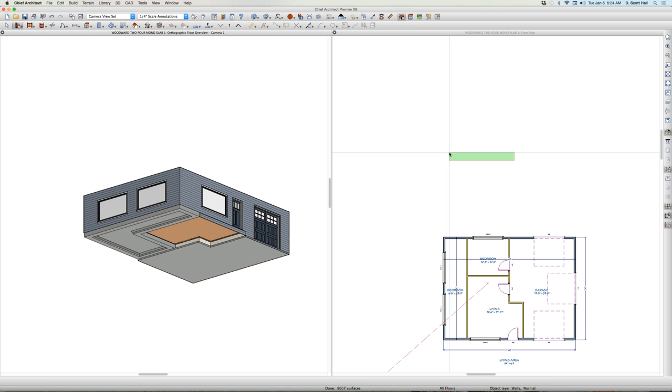This all started with a guy named Alan, ACAD user Alan. I'm going to try to cut to the chase as quick as possible. Here's the deal. Suppose I want to build a two-room structure. I'll make it real quick. I'm going to get to the whole purpose of it. I'm going to try to explain what I'm doing here.

This is what Alan, the ACAD user, had. He had a room here and he had a room here. He wanted to build with these exterior walls out of concrete block. I think they were concrete block. And he wanted to pour footing. He wanted to build this concrete block wall up to 10 foot high. And then in the center, he wanted to come back and pour monoslab here and here.

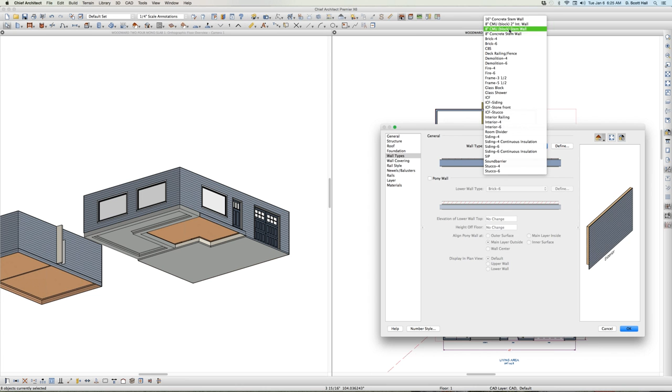And these walls right here are going to be concrete block walls. I think that's sort of what he was thinking, and I'll do it that way, just to make things consistent. These walls, he wants to change the wall type to 8-inch CMU block stem wall. So he wanted to build this structure with 4 walls of concrete block, then come back later and pour these 2 concrete slabs held in place, I think, by these concrete block walls.

But here's a key. He wanted to have a footing underneath this wall here. This is the garage, and this is a bedroom. So he wanted the garage lower than the bedroom. So he wanted a footing underneath this wall, and he wanted it to be monoslab that connected the two. Let me just see if I even have it. I don't even know if I have it. Screw it.

This is the purpose. I'm building 4 exterior walls, sitting on a footing going up, and inside I'm going to pour concrete slab. And I might just have a dividing wall right there. It might dictate that this floor is 6 inches lower than this floor. So I built a structure over here. I just got a little bit carried away and made it a little more complicated.

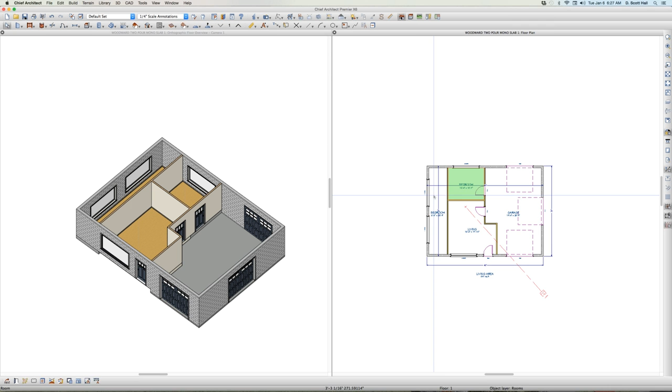Here it is. Here's his garage, and he's got a bedroom and a living room and these other rooms. Notice this garage is dropped 12 inches down, which is what a garage is, right? And if I looked underneath, the garage is a slab, that's a slab, and that's a slab. I've defined those as slabs. Monolithic slab foundation. I'm testing Chief. Here, a raised floor foundation.

Let's look at it underneath. What do you got there? Ain't this interesting? I call this a virtual slab. Have I built a foundation yet? No. I got level 1, period. By the way, I did a Skype with Glenn Woodward last night on this, and he helped me out a lot. So I'm just trying to take it a step further.

But the bottom line is, why do I have a slab with footings underneath this portion, which are the 2 bedrooms and the living room? The living room has a raised floor foundation. I get that. I haven't built the framing yet. This is out of the box, nothing special. But why don't I have footings for the garage?

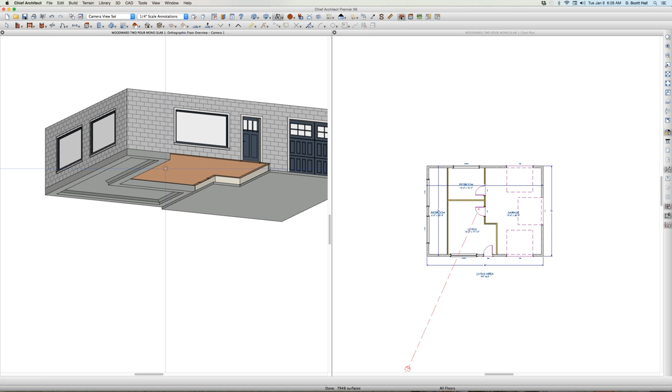I don't know. I call these virtual slabs, and Glenn might argue with me a little on the nomenclature. Are the virtual slabs really there? I don't think they are. I call them virtual because I can't control them. It's semantics. Glenn sort of calls them virtual based on certain parameters. Now the question is, what is controlling the footing and the size of this? What is controlling the depth of this footing?

Let's cut a section through here. I'm going to try to get to the chase as quick as possible. F6. Oh, this is really good. I'm going to cut 2 sections. This is going to be really good. F6. I'm trying to set this up, okay?

A slash, A, check that out. I automatically detailed this, you see this? Look at that, look at that. I have a footing at either end, right? Why don't I have a footing under here? I don't know. Is this room...

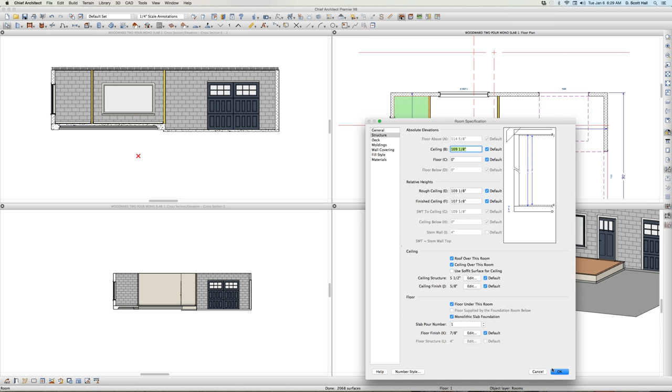Did I define any different structure, monolithic slab floor under this room? Cancel. Then this room here, oh, I need to call it a monolithic slab, you freaking nitwit. I guess I thought just because I had made it a garage, it was going to be a monolithic slab. And oh, there it is right there.

And quite frankly, I mean, get rid of this auto detail stuff. Delete. Auto detail again, auto detail again. I forget what it was. A bump, there it is. Ain't that interesting? Oh, look it over here. A bump, I'm just seeing.

Automatic. I have not built the foundation yet, I'm just showing you what you've got so far, and this is whatever it is. But you understand that what I don't have, I still don't have. I still don't really have this wall going down beyond the slab and then a footing underneath it. You understand? That's the whole purpose of this. The whole purpose of this is it's a 2-pour system.

I'm going to pour a footing right here, then I'm going to build this wall on top. And then I'm going to come back a month later, I'm going to pour this slab, and this is a floating slab. Now, Glenn, and I think Alan, ACAD user, will say that slab actually goes into the concrete block. And in Australia, I guess it does, and Alan does.

But I was just at a project I'm working on right now. I build my footing, build my concrete block wall, and then the concrete block wall serves as the form for this slab. And then you get a little shovel footing, whatever you want. Okay, whatever you want, I don't care. I don't care what you got.

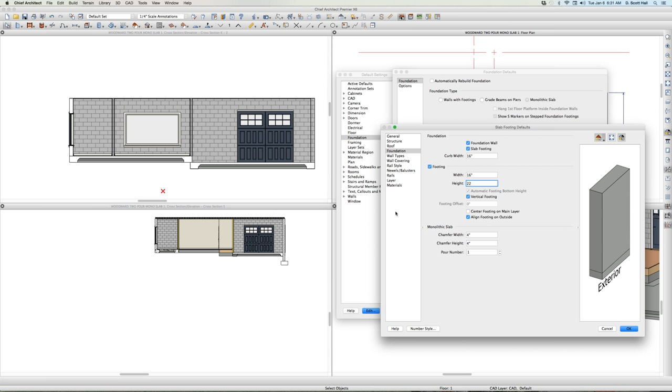Okay, and default slab footings. The P-Man and I, I think we sort of stick with a 22-inch depth, and I don't care what, that's what we do. Footings are 22 inches deep. Garage curb, 22 inches deep, or a garage footing. Done. Let's see what happened.

Did you just see what happened? A bump, see what happened? I was able to control the depth of those footings, and that's how I controlled it. Maybe you guys already know this, maybe not.

But look at this, oh, check this out. I got a slab here and a slab here. They're not even connected, are they? And we're going to address that, we're going to address that. And that's sort of the whole purpose of this.

This is what we're going to shoot for. I'm going to tell you what we're going to shoot for. What we're going to shoot for is when we auto detail, those two things are going to be poured at one time. That's what we're shooting for. Right there, all poured at one time. We auto detail, I mean, there are other ways around it.

I just did what I'm going to try to do automatically. And then I also want, this is the next thing I want to do. I want to do this. Give me a footing, 1 1. I want to pour a footing under here. You give it a fill, fill concrete.

I'm sorry, I'm leading up to this thing, and that's what I want. This is what I want to automatically see. I want to see that footing there. I think I want to see this concrete block right here, and then I want to see a slab with a shovel footing right there. That's what I want to see. That's what I'm going to try to do.